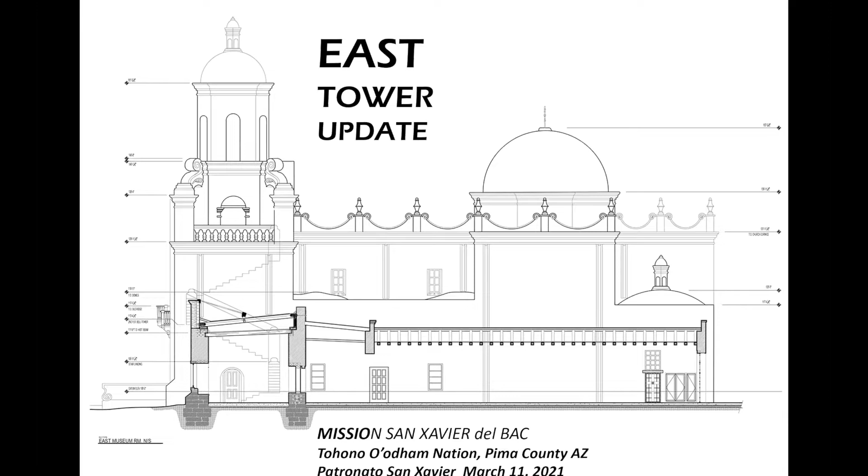The last time I presented this material, part of it anyway, was actually 3 years ago in the spring of 2018. And at that time I called it East Tower Story. But now it's the East Tower update, letting you know where we are and where we're going. So the focus of our current phase of work is the exterior of the East Tower. This is a detail of the plan of the mission. Here's the front archway, the West Tower, which was completed almost 12 years ago now, and the East Tower.

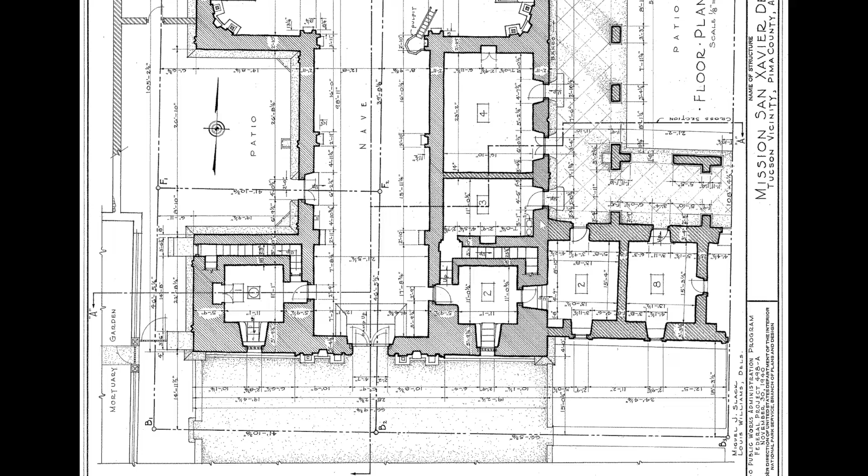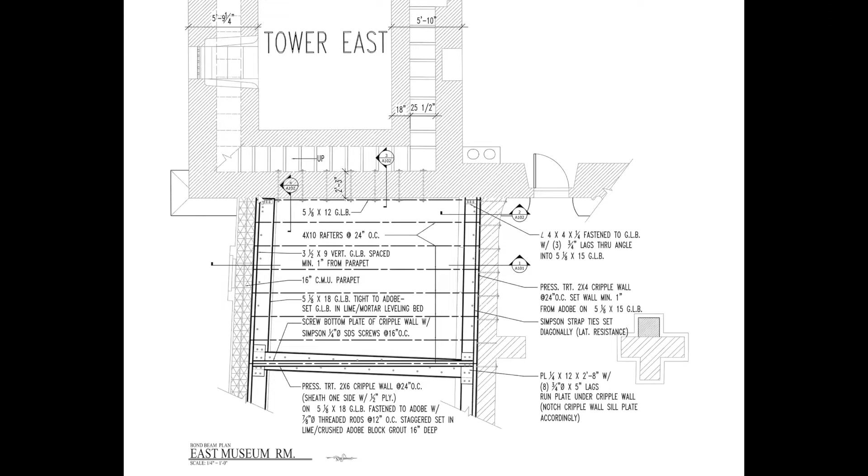Here's the tower. And these are mud adobe walls in what's now the museum. In fact, we were calling this the East Museum Room because it was the first room of the museum east of the tower. And we restructured the roof there and put in a bond beam to stabilize it against earthquakes. It also helps support the church in the event of an earthquake and provide support for scaffolding.

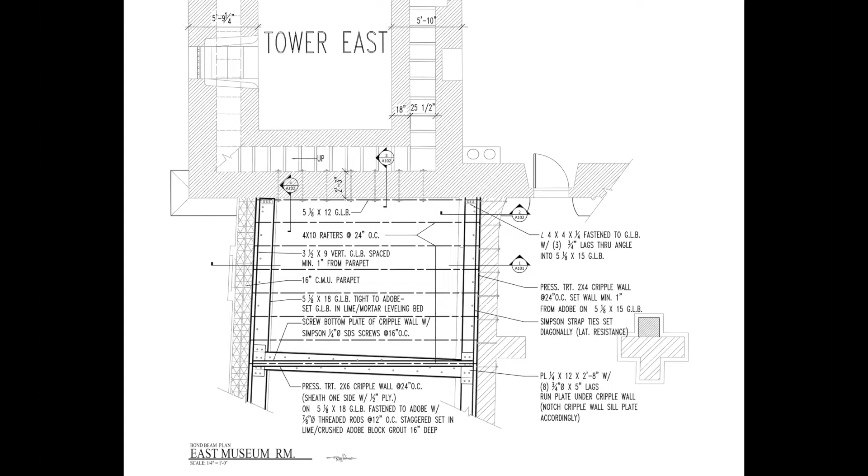Other areas that were completed in the first phase of work on the East Tower, the most important probably was the underpinning of the foundation. If you look at the mission from the south, you will see that actually the 2 towers are not plumb. The East Tower is slightly out of plumb. And once I pointed that out to Bunny Fontana, he never forgave me because he said, now I'll always see it that way. You can't approach it from the south without seeing that.

So under the guidance of our geotech, Ralph Pattison, we underpinned the foundation down to bedrock, which is 2 to 3 feet below grade. And what's interesting is in between the foundations, which were laid in the soil, and the bedrock, there's this kind of flour-like soil that was scraped out and substituted with lime and crushed rock. So we have a good solid footing, earthquake resistant. It's one of the best things you can do to resist earthquakes is have a good foundation.

We've also refinished areas of the roof that you see shaded here in a gray tone, essentially above the roof of the museum. This is the first museum room with 3-foot thick adobe walls. There's a propped up roof over the old original ceiling. So as high as a mason could reach from the roof has been repaired and refinished.

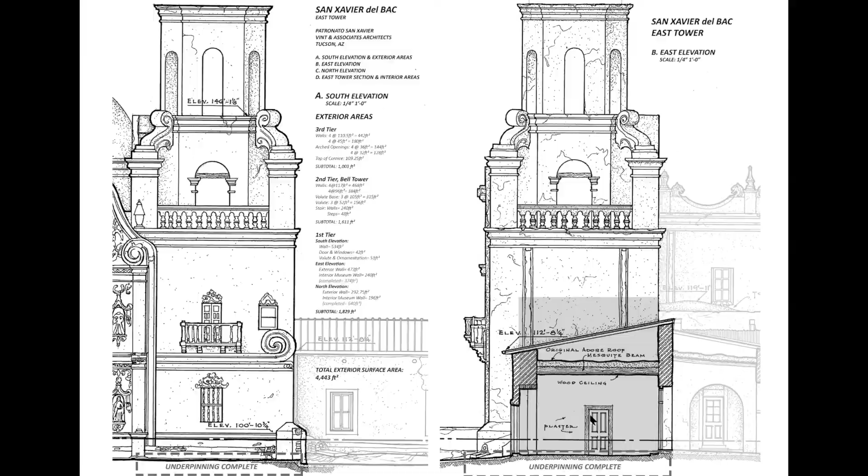On the north wall of the East Tower, we're into what is known as the chapter room, 3 vaults where the Franciscan chapter would meet periodically. And that room has been completed from the foundation up to the first level of the cornice.

Now this balustrade requires reconstruction. It was concrete and it had worked loose and it was removed in the first phase and will be reconstructed in the second phase out of brick and lime with fiberglass reinforcing against earthquakes. So we're using a mix of traditional materials and some modern materials that have proven themselves to be effective.

Also completed in the first phase was the interior of the first floor of the East Tower. This drawing here on the right hand is a cross section from east to west through the tower, showing the first floor room. There's the second floor room that opens onto the choir loft, and then what we were calling the first, second, and third tiers of the tower.

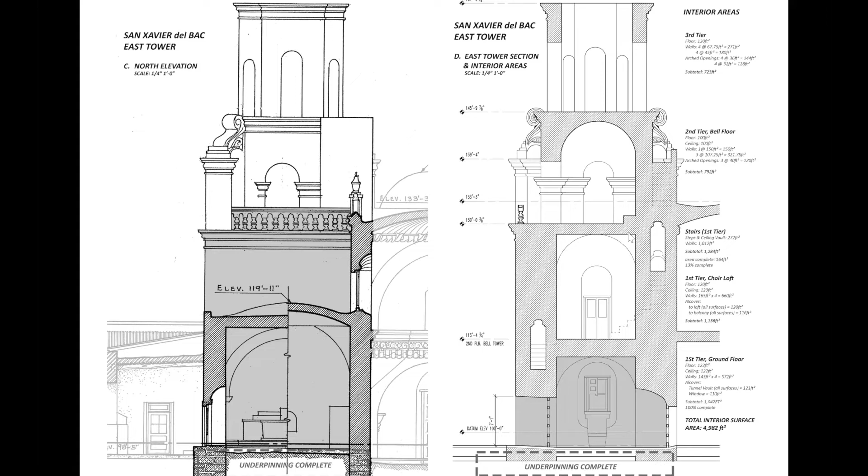Also in this cross section, you see the stairway that's wending its way up to the roof, which is actually a tunnel built into the wall. You've got masonry on either side of you, and you're walking up inside this tunnel that leads you to the roof. So the oldest stair in Tucson and still the best.

Details of the foundation underpinning. The Historic Survey back in 1940 had made an assumption that the walls were brick all the way through, and that the foundation was laid on large ashlar stone blocks. However, what we found is that, in fact, it's a lot less formal than that. For one thing, the walls are actually a brick veneer with a stone core.

And this was found as we worked on the other walls of the building. Beneath cement plaster, oftentimes the soft adobe was powdered to the point where if you scrape it down to a depth of 4 inches, we hit rock. And this happened time and again. We finally realized, oh, the building is actually rock with a brick veneer.

The way it worked was the brick was laid up essentially as formwork to hold the stone and the lime mortar while it set. So they'd build up, say, 2 feet of wall, fill it and compact it, wait for it to cure, lay up another 2 feet of wall, again, repeat that procedure.

And then these bricks that are deeper into the wall acted as a tie course so that the stone above would hold them down. And this way they essentially built a concrete wall, primitive concrete of lime and volcanic rock, and left the brick in place, which was the formwork for the concrete. And then that also provided a smooth surface for plastering and painting.

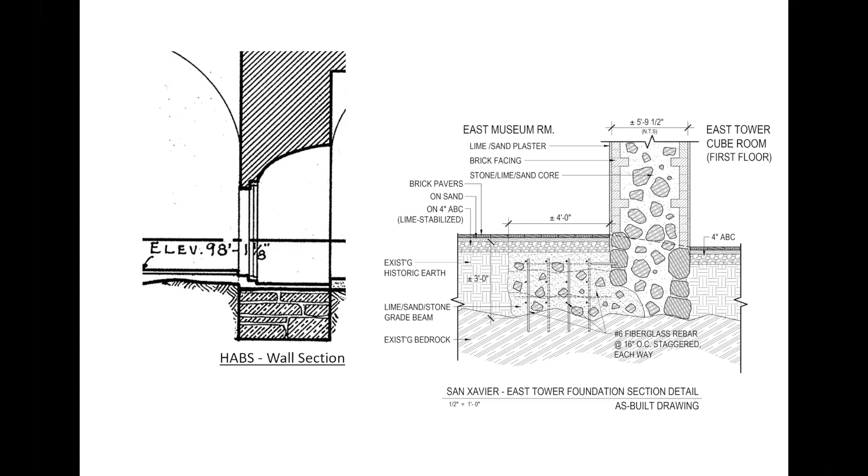And when I figured this out actually back in the mid-90s, I mentioned it to one of the Italian restorers, Vincenzo Centani, who, when I said, oh, this is actually a stone core to the wall, he says, oh, well, that's normal. That's how we build. It's a Roman system. This is how the Romans built the Colosseum, for example. Roman concrete work was a brick veneer, and then they filled the hollow with stone.

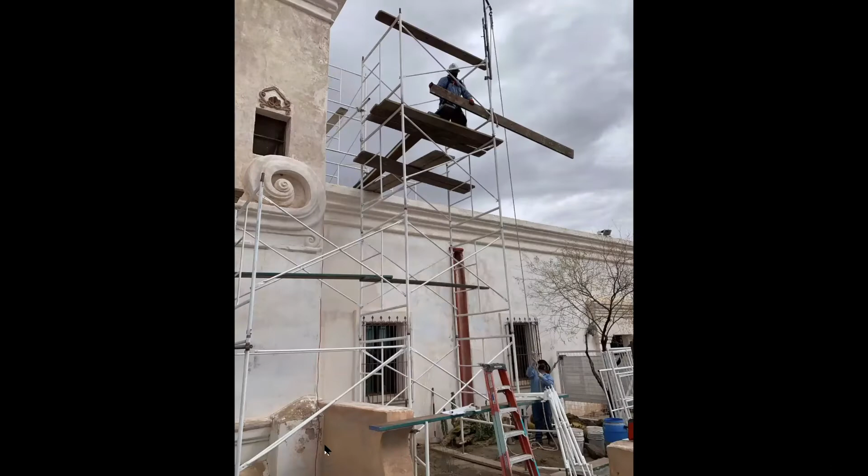And I learned actually on this visit last Tuesday that one of Eric's crew, Jarvis Swan, is from the village of Bac. He's worked with Eric since 1996 when Eric built the Stone Elder Center just west of the mission. And he's a guy from the district. And I was talking to him as the meeting broke up, and he saw on the fencing where Chuck had lined up the illustrative panels explaining the history.

There's a picture that Bill Steen took. It was in the New York Times article. There's a dog in the aisle of the church. And Jarvis says, "Hey, that's my dog in the picture. He always follows me and my wife to church." So we've got a guy who's right from there, who's an essential member of the crew.

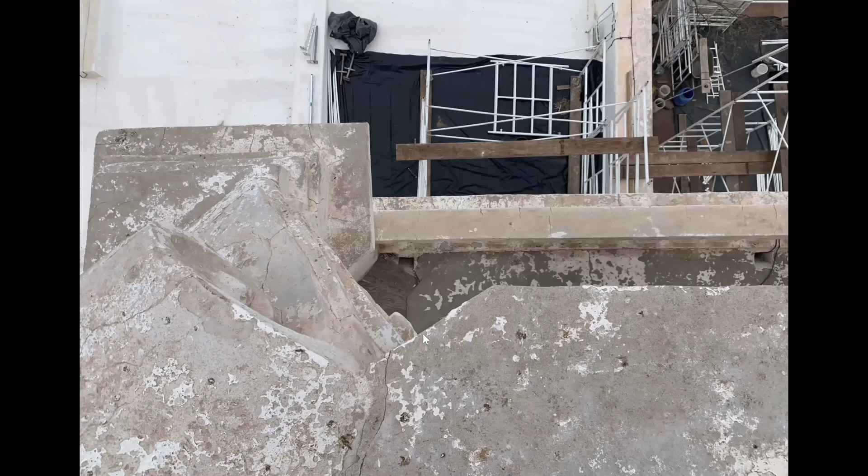Wherever it is detached and hollow behind, it'll be removed and the brick beneath repaired, and then it'll be replastered with lime and sand and cactus emulsion.

But I guess it's just kind of lending perspective to the fact that our little mission has attracted interest from around the world for centuries. And with that, I conclude my presentation.